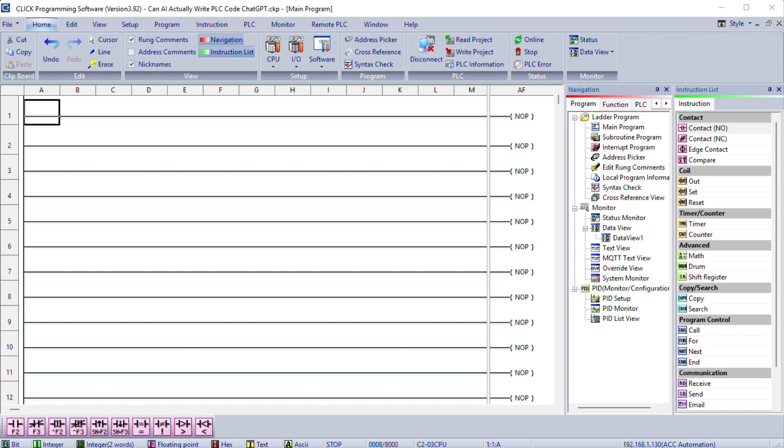There is a lot of noise right now about AI writing PLC programs for you, so instead of guessing, I set a trap. I gave both ChatGPT and Claude the exact same motor control task for the Click PLC, with a classic wiring gotcha buried in it, and checked whether the logic actually works. I fully expected to catch at least one of them out. Neither took the bait. Both wrote a working program, and they did it two different ways.

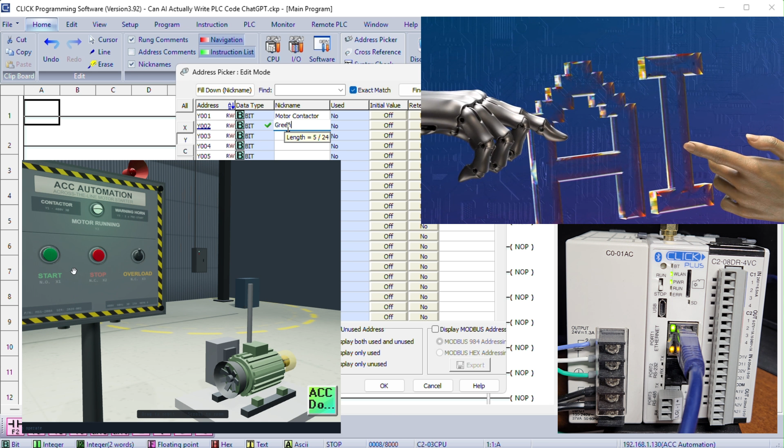Let's get into it. You can follow along for free. The Click software is a free download, and you can prove the logic in a free online simulator before it touches hardware.

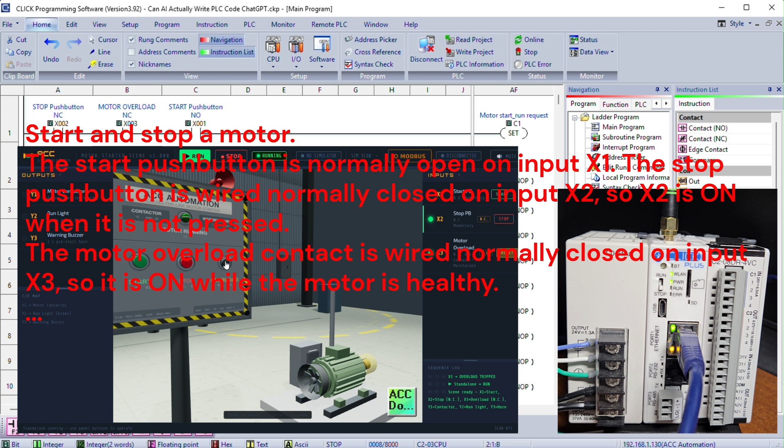The task I set. I wanted a task small enough to explain but real enough to catch a lazy answer. Here it is. Start and stop a motor. Start push button normally open on X1. Stop push button wired normally closed on X2 so it is on when not pressed. Motor overload wired normally closed on X3, on while the motor is healthy. Motor contactor on Y1, green running light on Y2.

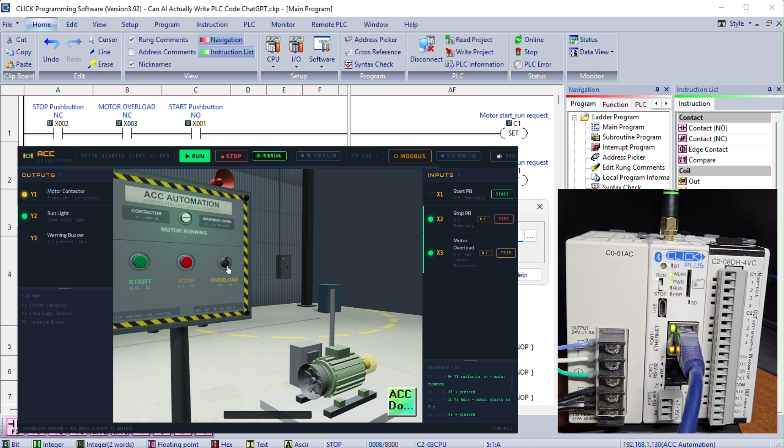And one twist, when I press start, a warning buzzer on Y3 sounds for 2 seconds first, then the motor starts. The gotcha is that normally closed wiring on the stop and overload. A lazy answer uses normally closed contacts in the ladder to match normally closed buttons, but that is a double negative. Those inputs are already on at rest, so the motor would never start. That is exactly where I expected an AI to trip.

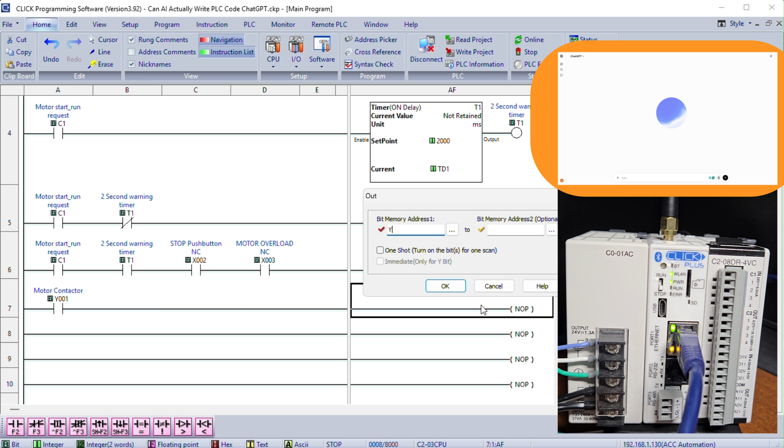What ChatGPT produced. ChatGPT answered in seconds, an address list, 7 rungs, and an explanation of each. Let me figure out the logic here. Okay, for a Click PLC, you can do it with an internal control relay latch and a 2-second timer. So, start push button normally open on X1, stop push button wired normally closed on X2, and motor overload contact normally closed on X3. Motor contactor on Y1, green running light on Y2, warning buzzer on Y3.

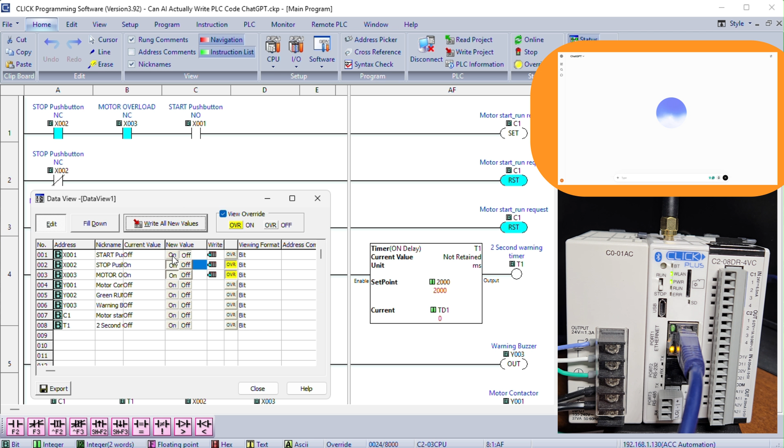Rung 1 uses X2 and X3 in series with X1 to set internal coil C1 and resets C1 if stop or overload opens. Rung 2 starts a 2-second timer when C1 is on. Rung 3 energizes Y3 buzzer while the timer is active, so it beeps immediately for 2 seconds. Rung 4 turns on motor output Y1 after the delay. Rung 5 drives green lamp Y2 on whenever the motor is running. That's a safe latching start-stop with a timed warning before energizing the motor.

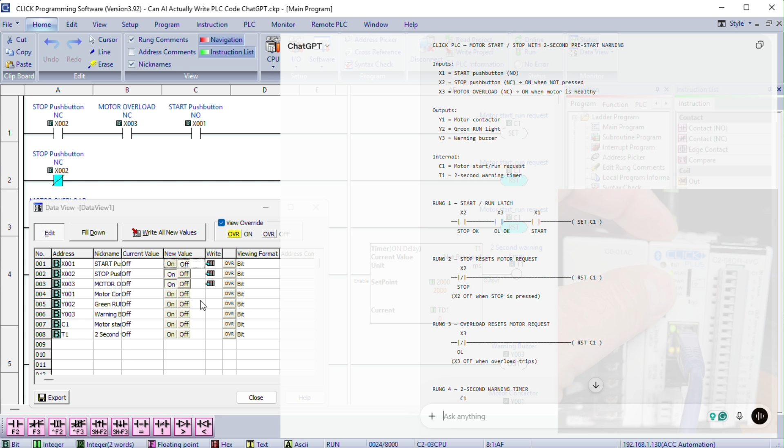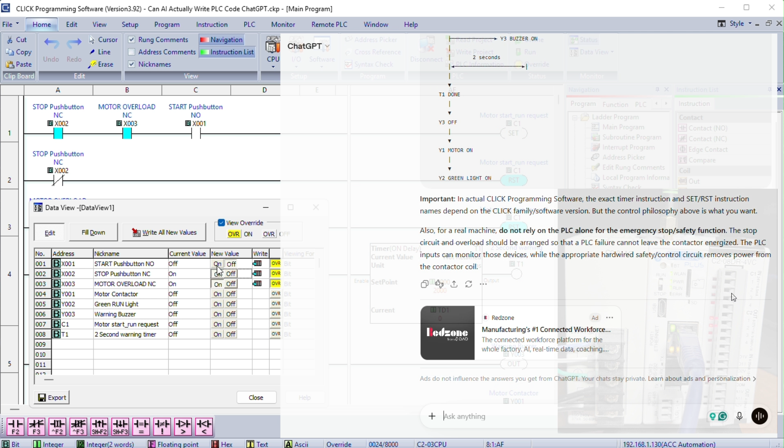It used a set/reset latch. One rung sets a start request bit when start, stop, and overload are all satisfied, and it gave the stop and the overload their own separate reset rungs. Then a 2-second timer, the buzzer while it runs, the motor when it finishes, and the green light with the motor. And here's the thing, it used normally open contacts for the stop and overload, which is exactly right for normally closed wiring. It did not fall for the trap. That is a working program.

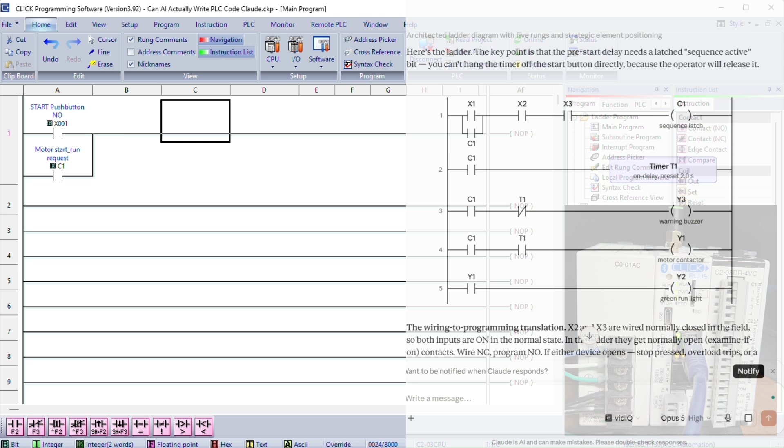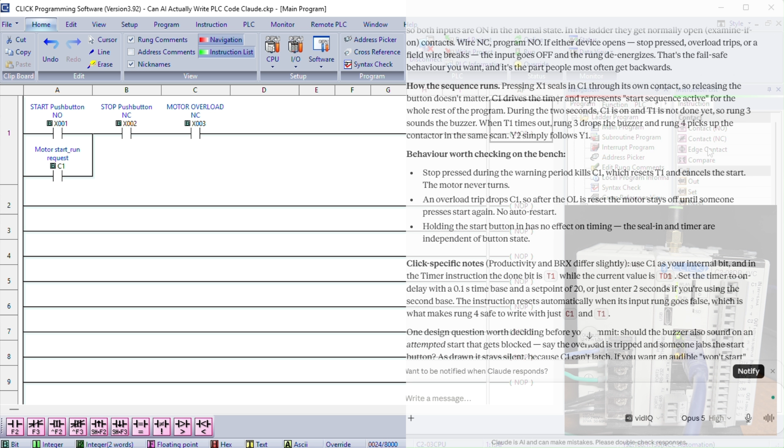What Claude produced. Then I gave Claude the identical prompt. Five rungs this time, and a different approach, a classic seal-in latch. It put the start button in parallel with the C1 bit to hold it in, with the stop and overload in series so either one breaks the latch. Same timer, same buzzer, same motor, same green light. Claude also used normally open contacts for the stop and overload. It handled the wiring correctly too, also a working program, just built in a different style.

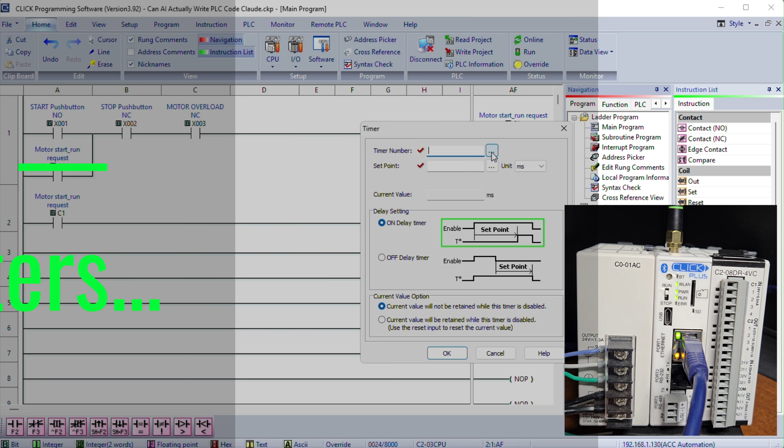Both passed? Why that matters. This is the honest headline. I designed this task to catch an AI out on the wiring, and both of them got it right. That is the number one mistake a beginner would make, and neither AI made it. On a clearly specified task, today's AI can write ladder logic that actually runs. That surprised me, and I would rather tell you straight than pretend otherwise.

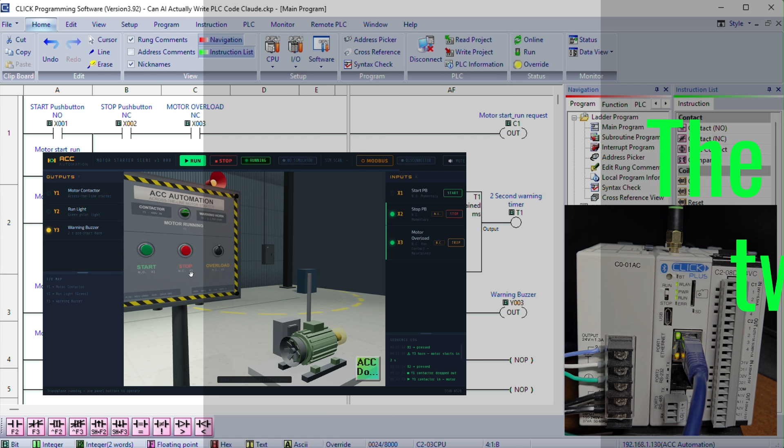The interesting part: two valid styles. The most useful part is not that they passed, it is how differently they passed. ChatGPT used set and reset. Claude used a seal-in. Both correct, and the difference is a real design lesson. Set/reset gives each stop condition its own rung. Easy to see why the motor stopped, easy to add another fault later.

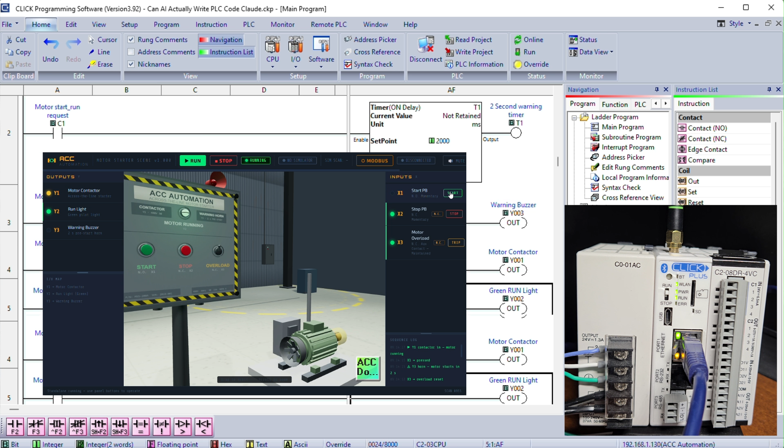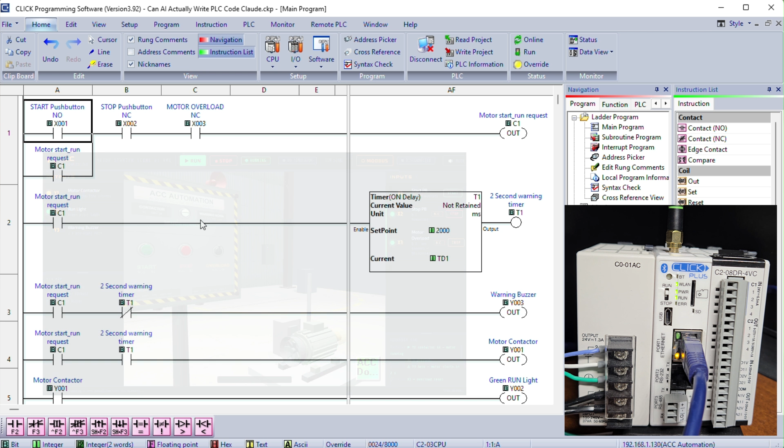The seal-in is the traditional starter every electrician knows. Compact, everything in one rung. For a simple motor, I lean seal-in. For a machine with lots of stop and fault sources, set/reset scales more cleanly. Two AIs just handed us both textbook approaches. That is a great way to see the trade-off.

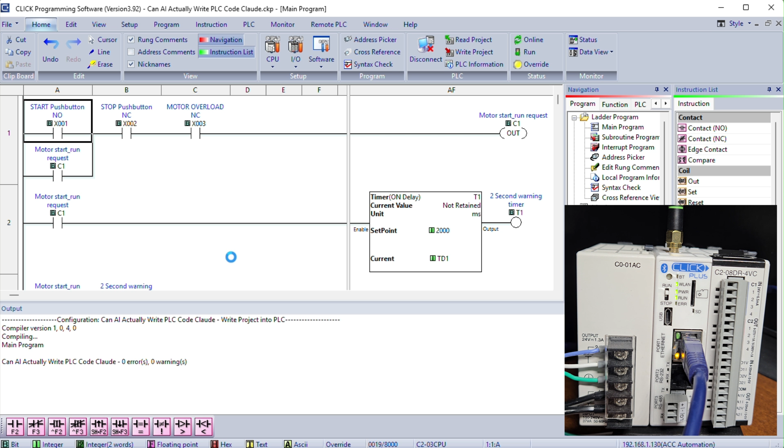Why it worked: the prompt. Before anyone says AI has this solved, here is the catch. The reason both came back correct is that I told the AI exactly what it needed: the real addresses, that the stop and overload were normally closed and on at rest, and the exact sequence. I gave it what I would give a coworker.

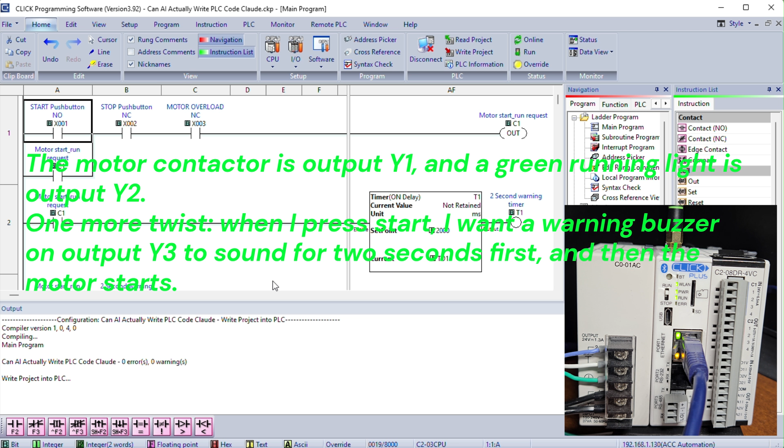Ask it vaguely, write me a motor start-stop program, and you get generic logic that does not match your wiring and may well fall for the double negative. The skill that made this work was not the AI's. It was writing a clear, specific prompt. That is the part worth practicing.

The one thing I would still add: both programs are correct, but I would still change one thing on either, and it is not the code. Both run the overload through the PLC. That is fine for control, but it should not be the only thing stopping the motor on a fault.

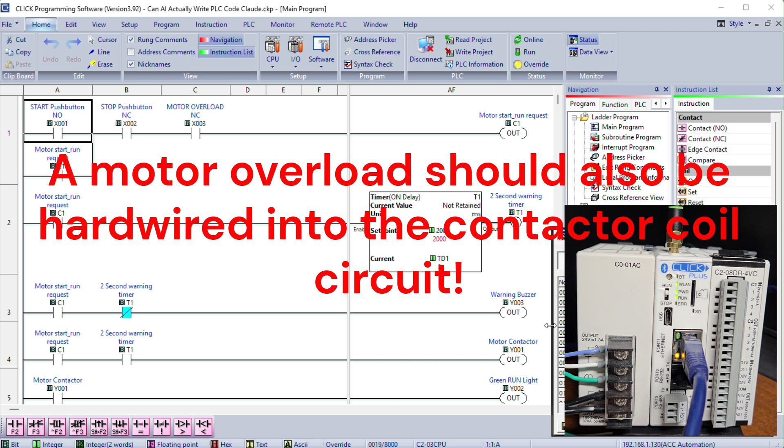A motor overload should also be hardwired into the contactor coil circuit, so the motor drops even if the PLC halts or an output fails. Neither AI mentioned it because neither AI knows how your panel is wired. That judgment is yours.

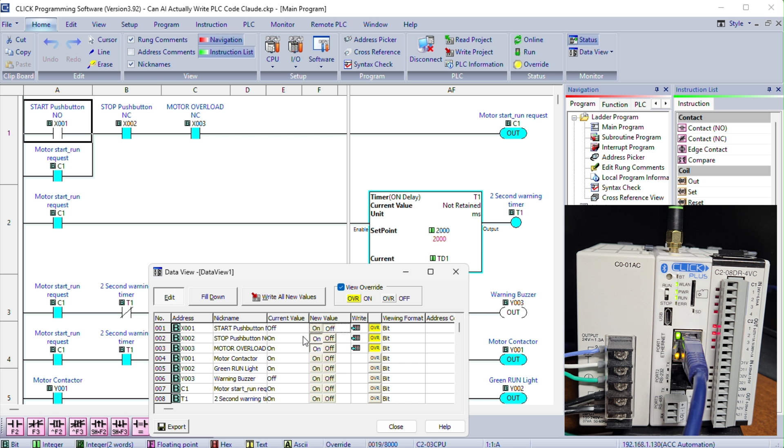I still tested it. Correct on paper is not proven, so I ran it. The Click software has no offline simulator, so I connected the PLC, went online, and forced the inputs in data view with the wiring off. Start, buzzer, two seconds, motor on, green light. Drop the stop, then the overload. Each one kills the motor. Only then would I let it near a real motor with that overload hardwired as a backstop.

The verdict. So yeah, can AI actually write PLC code? Yes. I went in to catch it out, and both ChatGPT and Claude wrote correct working logic for a real task, each in a different sound style. But writing correct code for a task I specified perfectly is not the same as programming your machine. It does not know your wiring. It did not think about hardwiring the overload, and it will never be responsible for what your program does.

The limit is no longer whether AI can write a rung, it is that it cannot see your machine and cannot own the outcome. You can, and you do. Use it the way I do. Write a clear prompt, let it draft the logic, verify every line, test with the outputs isolated, keep safety in hardware, and put your name on it only when you understand it.